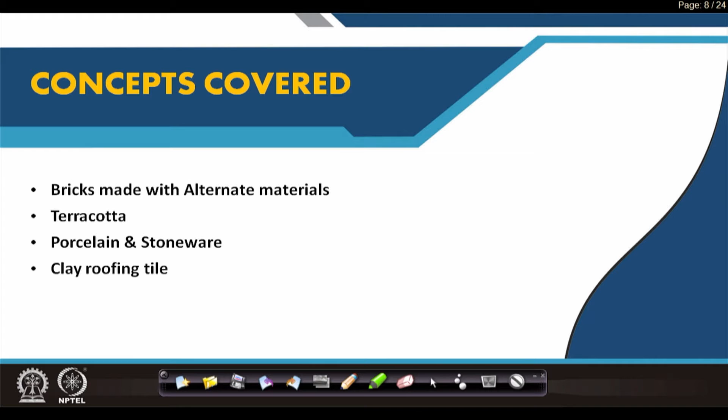Welcome back. Let us start today's lecture, lecture 3 of module 1, which is the continuation of clay products. What will be covered is basically bricks made with alternate materials. It is a shift from clay, but as alternate material, what are the materials that help in making what is also called brick. Then we will go back again to the clay items of terracotta, porcelain and stoneware, and clay roofing tiles.

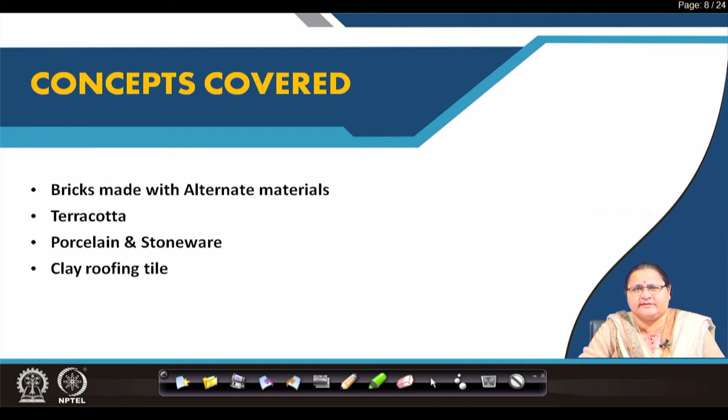Brick, as we have all understood, was the building material, the basic material which most of our country or developing countries like ours are using, but it causes a lot of depletion of our natural resources. At the same time, we need to look into the wastes, how we can take care of them, and whether we can use them up in the form of this tablet or brick.

Fly ash is one such waste product which is coming out after combustion of pulverized coal. It is very fine, finer than sand. It moves around in the atmosphere in and around a thermal power plant generation area. It pollutes the atmosphere too, but it is collected in ash ponds, wherefrom it can be carried to a brick making area. Following similar principles, it was tried or evolved as an alternate building material replacing clay brick.

So, it is little lighter than clay brick, it absorbs less water, it is machine made and dried in a controlled environment, and remember, no burning is required. It is less energy intensive. At the same time, it is consuming a lot of waste material.

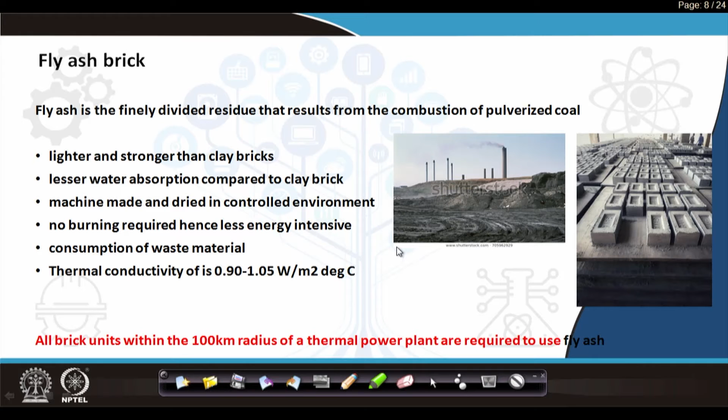So, what are the advantages? It is energy-wise less energy intensive, it is using up the waste as its raw material, it does not take so much time, it has to be dried in a controlled environment, and then you can sun dry it.

These are molded from machines, as you can see in this picture taken from Gava fly ash brick factory in Kharagpur. You see the fly ash which is lying has been converted to this brick. So, a lot of construction is being done using this fly ash brick.

It has become popular, and gradually it is at par in price with clay brick. Earlier it was coming much cheaper, and that was also a sense why general people did not buy it—they thought it is cheaper because it is inferior in quality, but it is not like that.

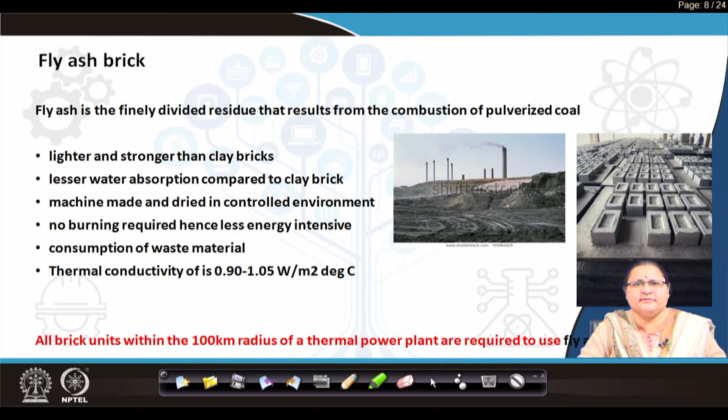Fly ash brick is one such item, and if you see the ingredients, fly ash is around 60 to 80%, and the rest is sand and cement, which is around 8 to 10%. It may also be replaced by lime, because cement or lime is the stabilizer which helps the items to bind together.

These are mixed with the desired amount of water to get the desired consistency, molded, control dried for 24 hours within a factory shed, and later put under the sun, then ready for the site.

So, you can see the strength here, it is as good as a second class brick. Weight is almost like that of a first class brick, however clay bricks may be a little heavier. Fly ash brick maintains this 2.6 kg weight, and its use is similar to that of clay brick. You may plaster it or not plaster it, because the water absorption is also up to 15%.

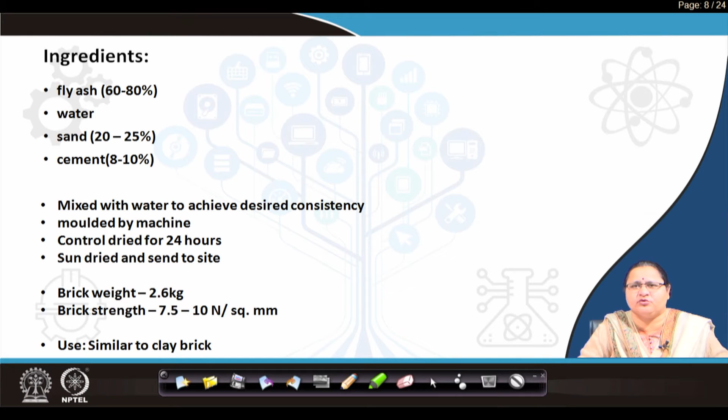Now, I introduce another item: since 2005, our Auroville Earth Institute has experimented with earth blocks.

This is compressed stabilized earth block in form of bricks or in different shapes as required. This is moist earth or clay, what we call, put under high pressure, around 20 Newton per square millimeter pressure, becoming building blocks.

They have much lower embodied energy as compared to even fly ash brick and clay brick, with low carbon emission. Fly ash brick creates a lot of pollution, and the clay fired brick also involves a lot of fuel burning, which leads to carbon emission.

This compressed stabilized earth block only uses pressure to make it a stable earth item, and the compressive strength is also between 5 to 7 Newton per square millimeter, which is quite good.

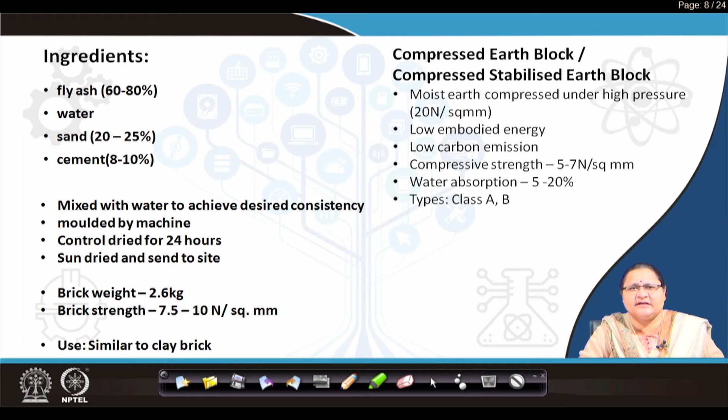With this, we are done with all the types of brick items which are the basic building block. Let us move to terracotta. Maybe some of you are familiar with this kind of image displayed here - this is the facade of or entry of a temple, showing a lot of ornamental work.

This facade faces the inclement weather, and it is standing for a few hundred years without any damage. Why so? The ingredient is not just clay.

Clay has been supported with ground glass, crushed pottery - that is broken pottery items which have been ground and used - and clean white sand. So with clay, which is the maximum percentage, goes ground glass, crushed pottery and white sand, mixed very nicely many times in the pugging mill, then molded out with ornamentation on it.

With this ornamentation, the entire thing is put into the muffle furnace and is being burnt.

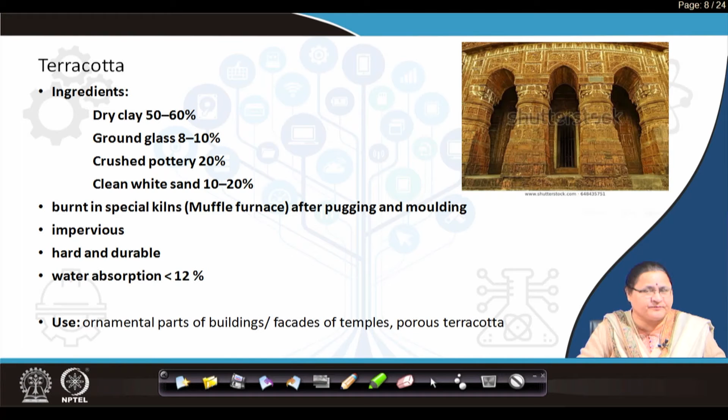These have a glass-like coating on top, and it is seamless, very smooth. Why is this used? Because it has antimicrobial property. It does not carry stain, and it is not affected by acids and alkalis.

It has a permanent coating on top, which is the glaze, made of china clay, feldspar, kaolin, silica and clay baked together at a high temperature to achieve vitreousness. As you had seen brick going up to 1100 degrees centigrade or so, these items are baked at higher temperature to get the quality of vitreousness, vitrification.

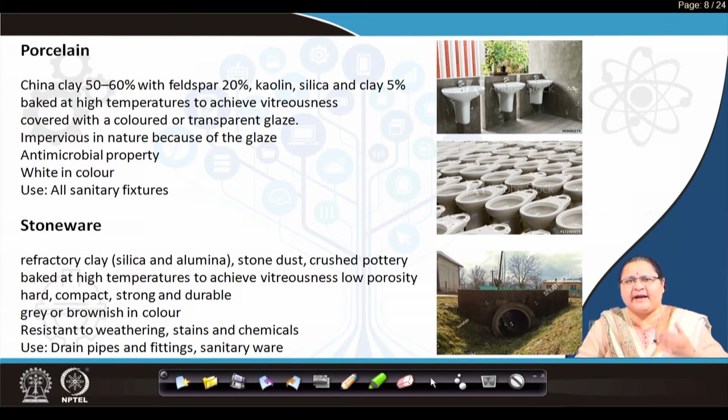Another item which I have not put into the slide is earthenware. Those are not so stable like stoneware, but they also find their use, not much in building industry, but also some in piping. Now, after we finish with all the items, we come to the last one, clay tile, particularly clay roofing tile. We have flooring tiles, we have wall tiles which are also made of clay, but we will cover that when we are into glass and ceramics.

So what you see here, this clay roof tile is used as a unit to cover the roof. When you go along countryside, you can see such kind of images. It is usually sloping, as you see in this section, and the most important point is they are much thinner than brick and do not take much load.

Yes, one human load, two human load, 2-3 people can go on top of the roof for some repair and replacement work, but it cannot take load. So you cannot have an independent floor on top of it. It is only to protect you from rain and wind, so it is the covering or the roofing. What you had seen, brick was created for walls, but here it is made for the roof.

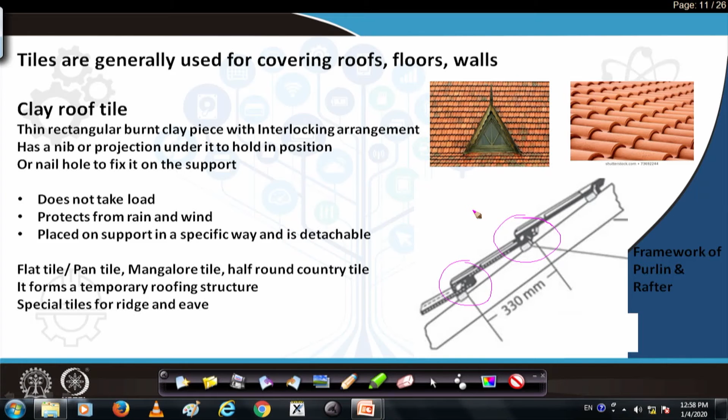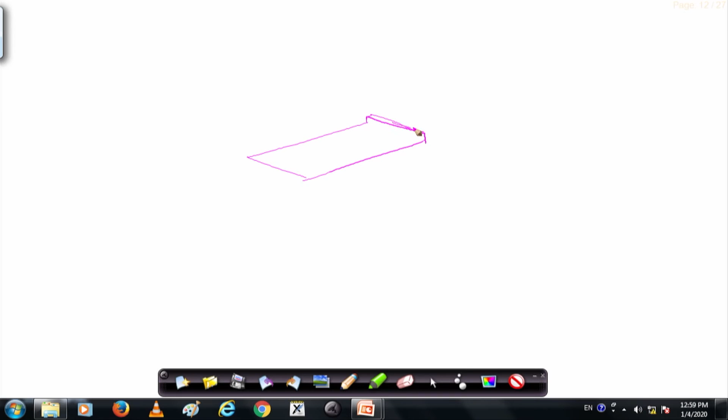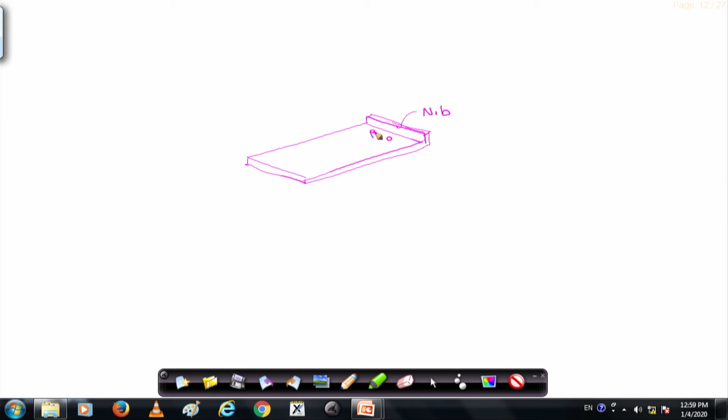It has a supporting member or a nib that will help it hold or cling, that is called the nib. It holds the tile to cling with the purlin or the framing system. I will show you a better picture. And you have two holes which are called the nail holes, which run through and through, on which you can screw it with the support onto which it is clinging. This nib may be continuous, this nib may be in pieces.

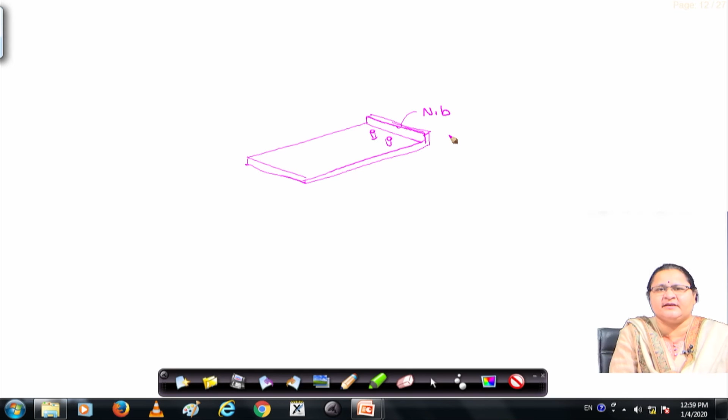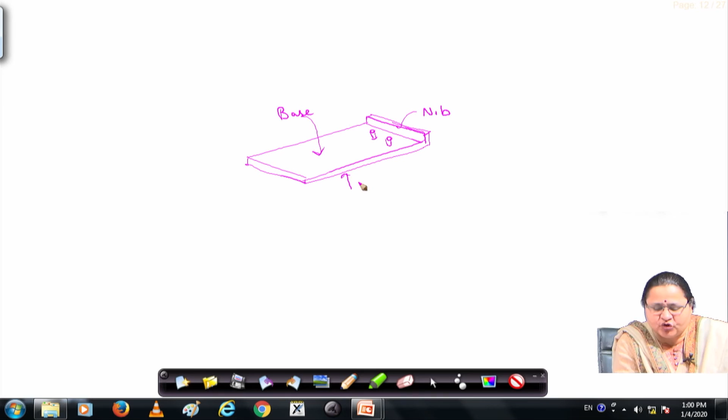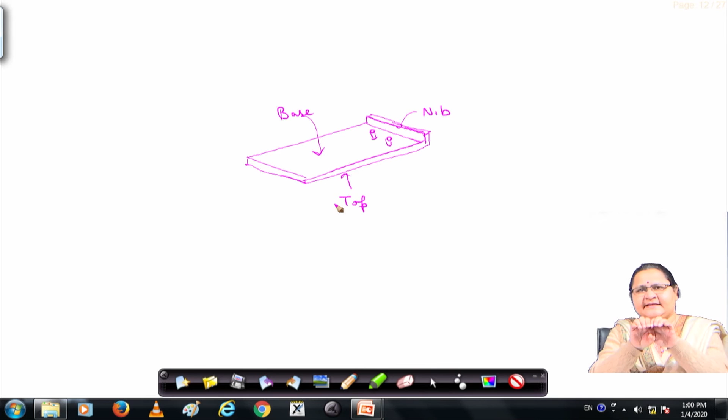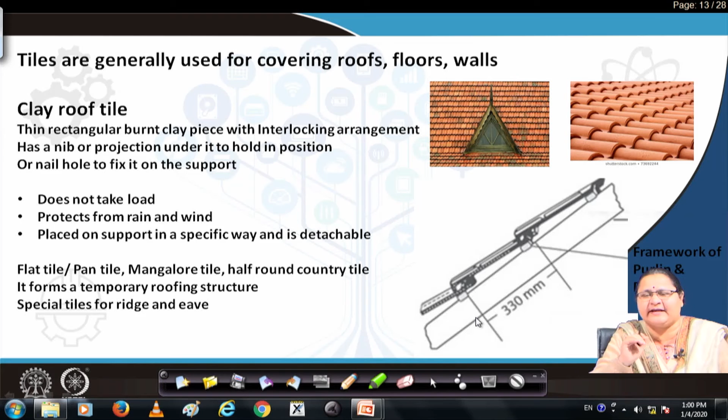So this is the base of the tile what I have drawn, and that is the top part which you see below. So this thing is actually like a claw, it is holding the vertical member, the frame, and sitting there. So what I drew is a very flat tile or a pan tile. Across the country you will see Mangalore tile, half round tile and various names, various forms, but you have to remember there is an interlocking arrangement. I had drawn the flat tile. So how is the interlocking happening? Let us see in the next slide.

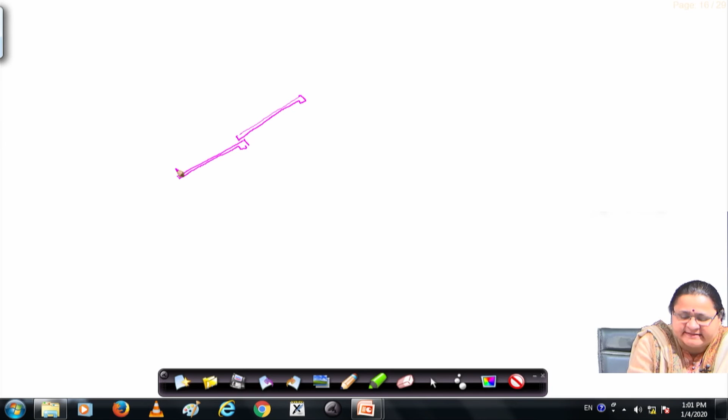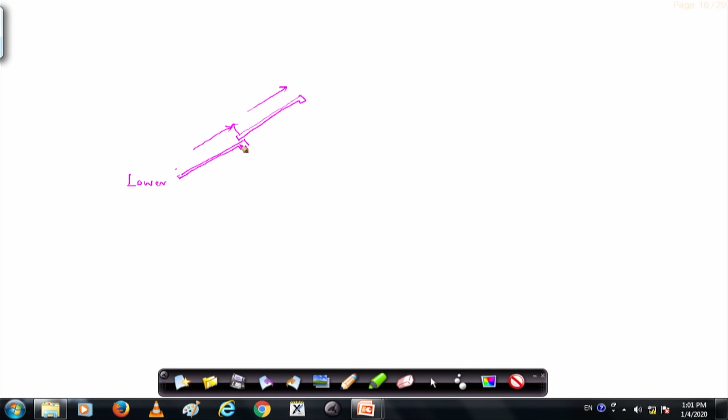So, if this is the framework, your tile is sitting like this and your next tile is sitting like this. How are you starting? You are starting your tiling process from the base, from the lower, and moving to the higher, because you cannot pick up this and place this one. So, you are placing your lower tile first and then topping with the upper tile, and below is the frame.

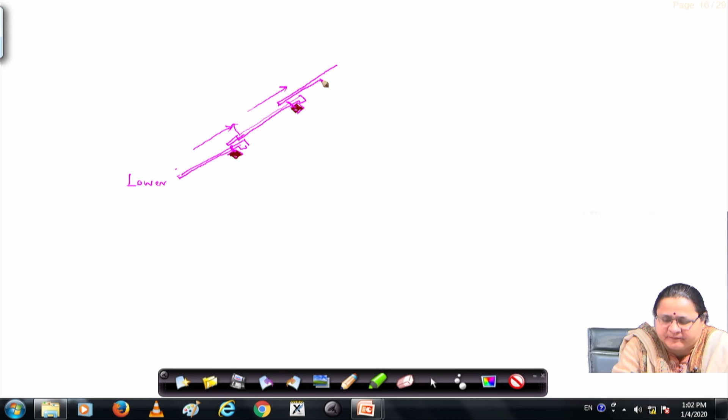Maybe this is the wooden frame onto which it is clinging. So, how much will this go? This tile will actually have to protect the nail hole. So, here is the nail hole. The next tile should start from here, so that no water can enter into the system, into the room.

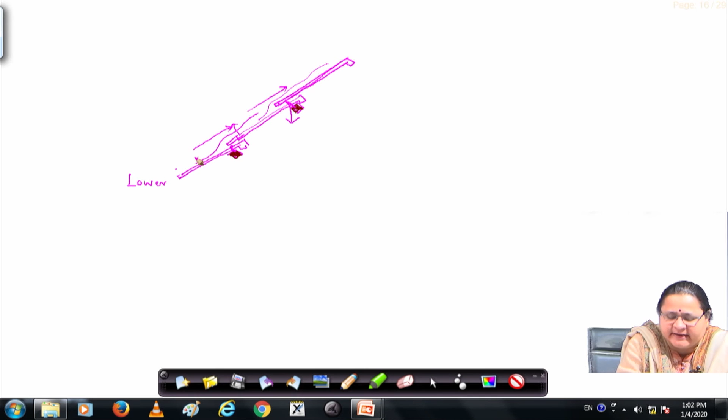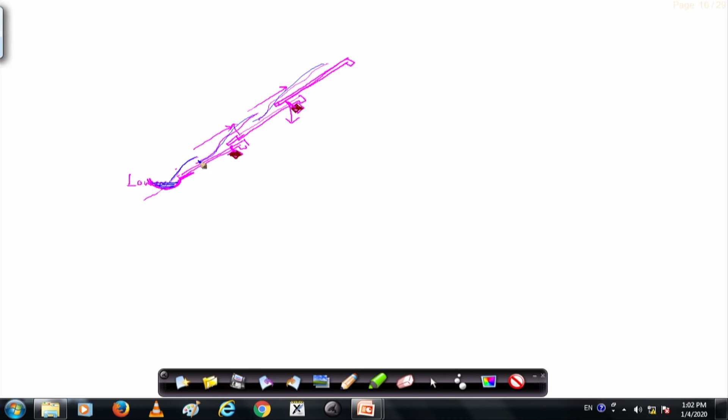You have to remember this upper tile should cover the nail hole and it must drain all the water to the next, and again next, and again next. At the end you must have a special gutter system, which again will be supported, which will collect the water here, which is coming down and gets drained. So no water can enter here and disturb or allow water entry into the building.

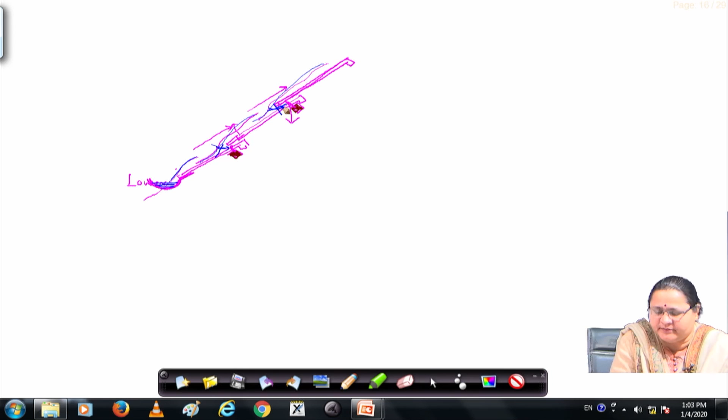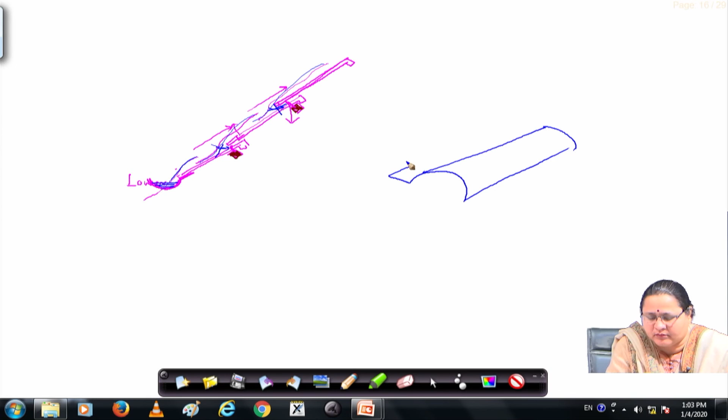Now, what happens on the sides? You will see, when you are getting the view, you are seeing only this circle thing with a very small gap which is allowing the water to flow. But actually the tile starts from here and goes till there, again it starts from here and goes till there, where the lower part is not visible.

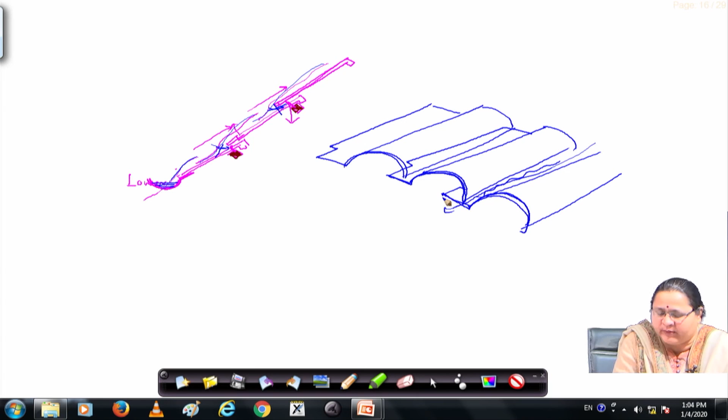It may be sometimes under tile and over tile, something like this and something like this. So this may be one tile and it is supported with an over tile. There may be many types.

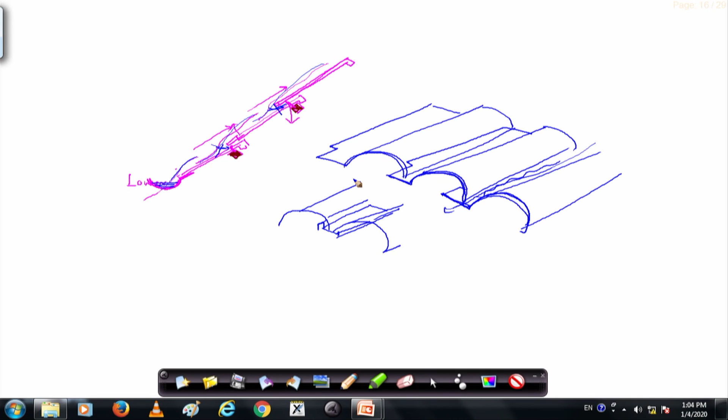On the side there is again an interlocking method adopted, so that water does not leak into the roof. On this side you are having a tight interlock, on this side you are having like a claw interlock, and the over tile, the upper tile, is covering the nail hole, so that no leakage is happening. So your roof becomes watertight.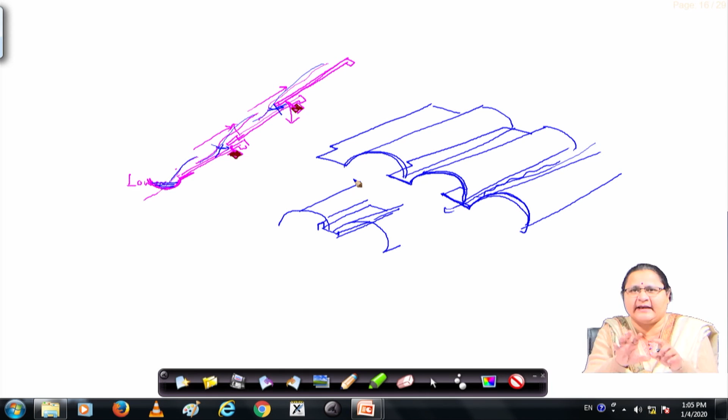And any kind of replacement required - as I told you, these are not capable of withstanding load. Even a hitting of a stone can make it break. So you can actually move it, take out the nail holes, and replace the tile.

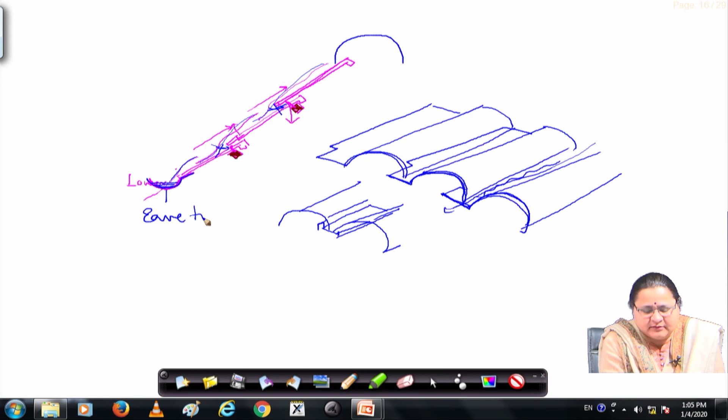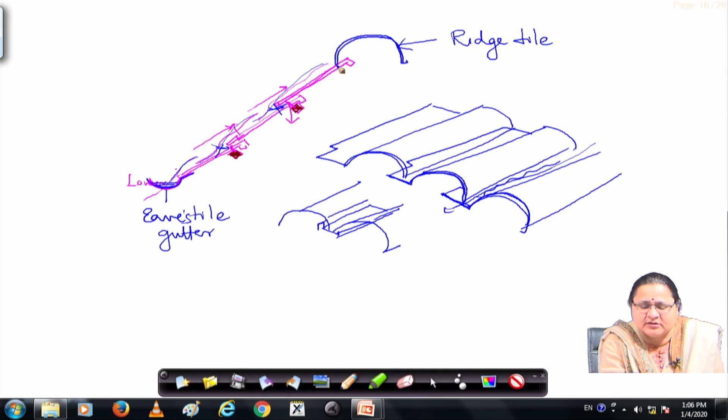What happens at the top when it is ending? As you had something called the eave tile, specially made to the eaves gutter - eaves gutter as a special tile. For the ridge or the top, you can have a special ridge tile, so that no water can enter through here. So, now this sits on the frame which I had shown you.

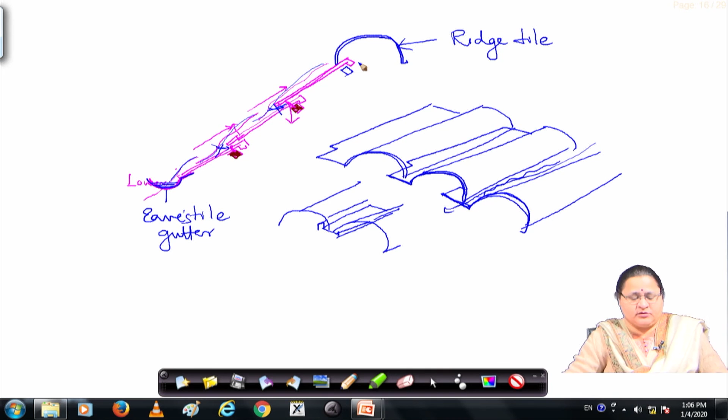So let us go back. This is the frame. Now how are these frames to be fixed? You have to know what is the locally available tile dimension. Based on that, these wooden supports called purlins are to be fixed, and these are the common rafters onto which they are to be fixed. Here comes the ridge, here comes the ridge tile, here end comes the gutter tile, the eaves gutter, and in between these you will get your tiles.

Now, here you see a further detail, you can see the nail hole, and you see the upper tiles are one on top of other. Here also you can see the same thing. So this is a very indigenous way of doing. All our countrysides, all our rural India still uses it, they are using it, and they can replace it, and they can have the repair of it, and have a weather resistant, proper roofing to their house.

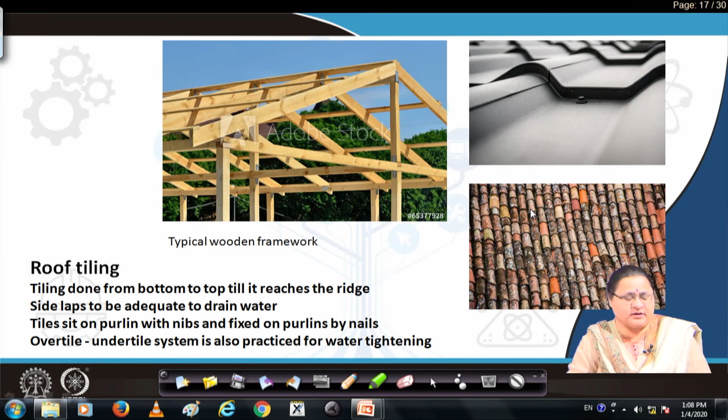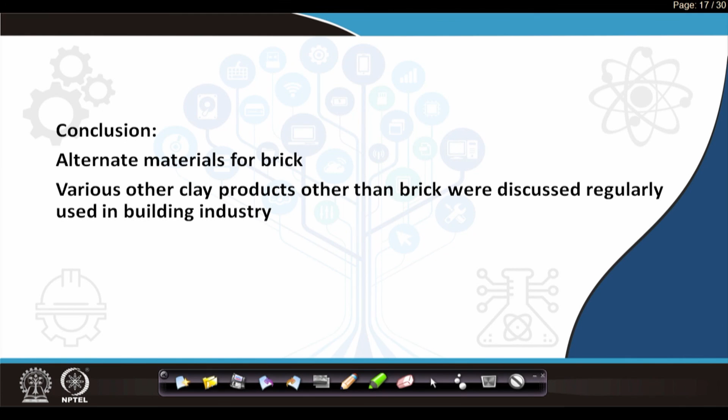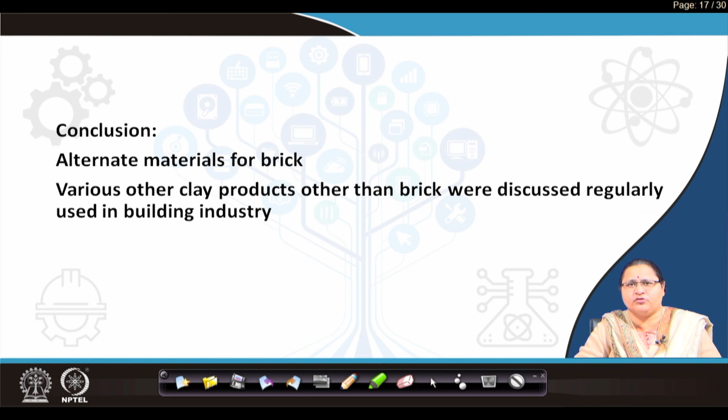With all these, I conclude with the clay items, clay products, and also the alternate materials used replacing brick. The various other clay products that we studied are the terracotta, the porcelain, the stoneware, and the clay tile. Under clay tile we understood how it has to be fixed. Similarly, we knew in case of brick how bricks are to be arranged to get brick masonry. Here we understood how clay tiles are to be placed to get a proper weather resistant roofing. So we conclude here with clay, and thank you to all.